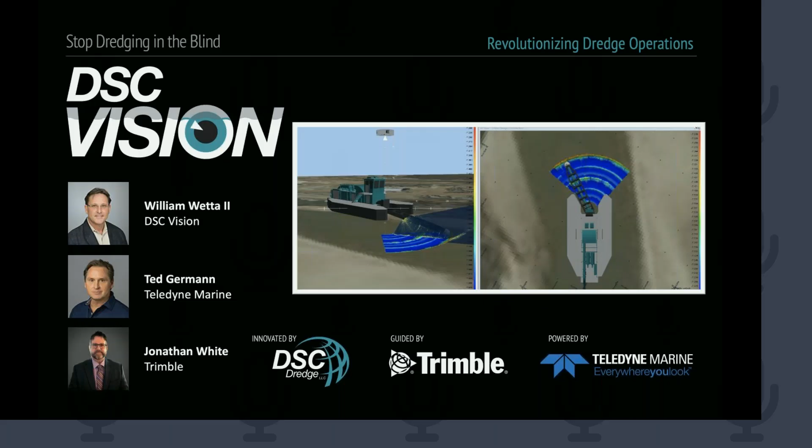Moderate today's event. Thank you for joining us for today's webinar, DSC VISION, Revolutionizing Dredge Operations. DSC VISION is an exciting new collaborative technology that we're pleased to share with you all.

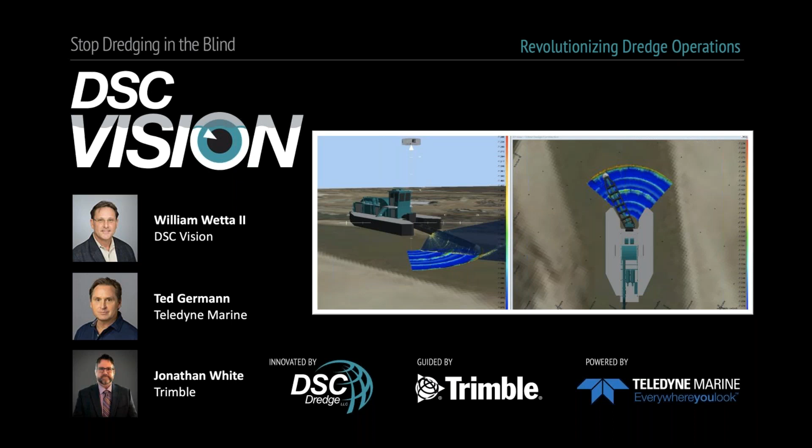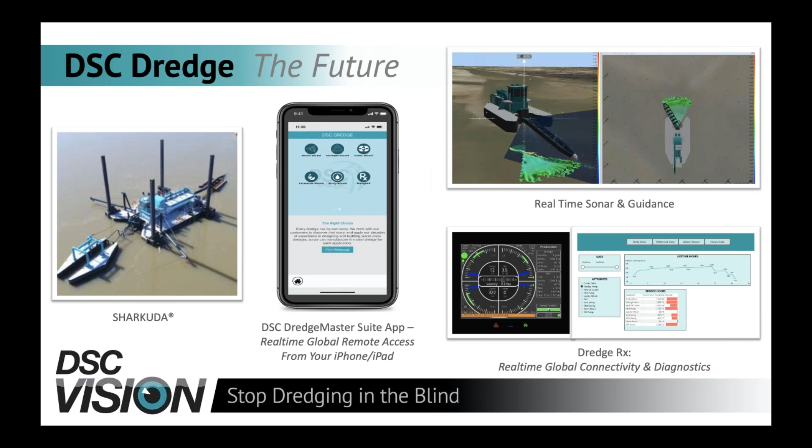Before I go on and talk about how all of this falls into the DSC Vision package, I want to let you meet some of the team that made this an affordable and available product now. So I'm going to turn this over to somebody who's become a good friend of mine in the process of doing this. This is Ted Germann. He's the Vice President of Business and New Markets with Teledyne Marine. Thank you very much, Bill. And that was an excellent introduction to your company. And I think as we move through our talk today, you'll see why all of these companies have come together.

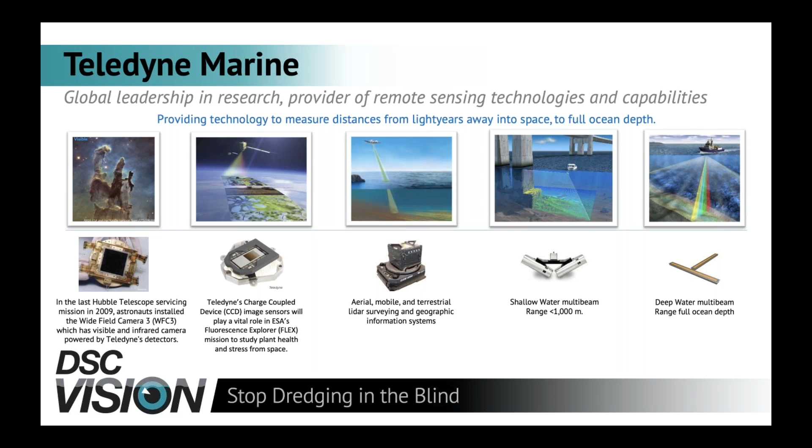It is a very long, impressive list, and it's our ability to work strategically with these agencies to solve some of the world's toughest scientific problems that led to bringing DSC Dredge, Teledyne, and Trimble together. Next slide, please.

The challenge that we had put forth to us was we'd like to take that great imagery provided in your hydrographic and survey space, generally used on a survey boat. Many of you on this call are familiar with pre- and post-construction surveys. How can we move that technology into a real-time visualization solution for the operators in heavy construction equipment, whether it be a wire crane, an excavator, or a dredge?

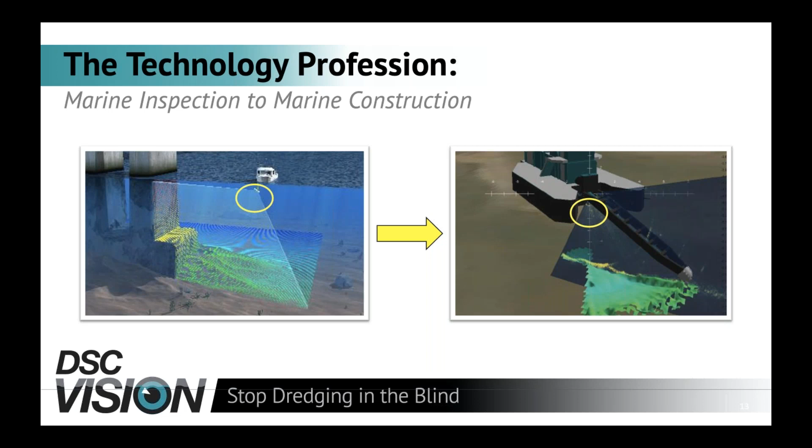And that again is where Teledyne and Trimble Technologies have come together to provide excellent guidance and GPS locations for where work is being done anywhere in the world, and it can be seen real time anywhere in the world. And with that, I turn this over now to our friends at Trimble, Mr. Jonathan White.

Thank you, Ted, and thank you, Bill, for having us here today. Again, my name is Jonathan White. I'm a product manager for Trimble's Civil Engineering and Construction division, and my focus is in the marine business area.

So next slide, please. For those of you who may not have heard of Trimble, we're a very large, publicly traded technology manufacturing company. We're similar to Teledyne in that we also have a diverse product portfolio with technology used across many industries and markets, but we pride ourselves in being a global leader in connecting the physical and digital worlds through our primary core business, which is geospatial and construction surveying, including machine control.

Trimble technology is deployed on some of the largest construction projects around the globe. And over the last 30 years, we've built partnerships with an extensive range of OEM manufacturers who offer Trimble guidance and machine control on their own machines. Today, we can add DSC Dredge to that list. Next slide, please.

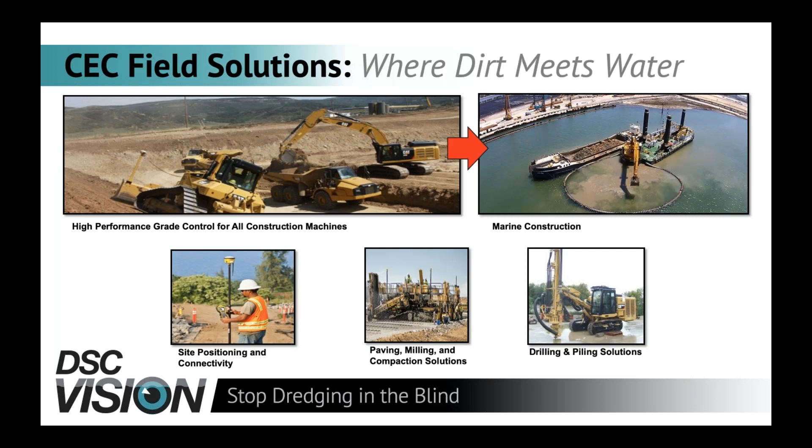So over the years, we've taken what we know about machine control and guidance in land construction and applied it to where dirt meets water for marine construction applications. Of course, that's why we're involved in this partnership you're learning about today. Other Trimble civil engineering and construction markets which may be relevant for this audience include our extensive range of site positioning and connectivity solutions, also paving, milling, and compaction, and drilling and piling solutions. Next slide.

The Trimble technology integrated into the DSC VISION system provides precise position and heading and also measures motion of the ladder and attitude of the dredge. The sensor data is communicated back to DSC VISION, so the location of the cutter tool and the sonar soundings can be accurately measured and displayed within the DSC VISION user interface. The Trimble MPS 865 GNSS receiver paired with ruggedized marine-grade antennas provide that position and heading.

By GNSS, I mean that the receiver makes use of multiple satellite constellations, not just the United States GPS satellite constellation. This means that you have more satellites in the sky, which helps to quickly and accurately triangulate your position on the ground, or in this case, on the water. Different levels of precision are available, from greater than a meter down to 1 to 2 centimeters of accuracy.

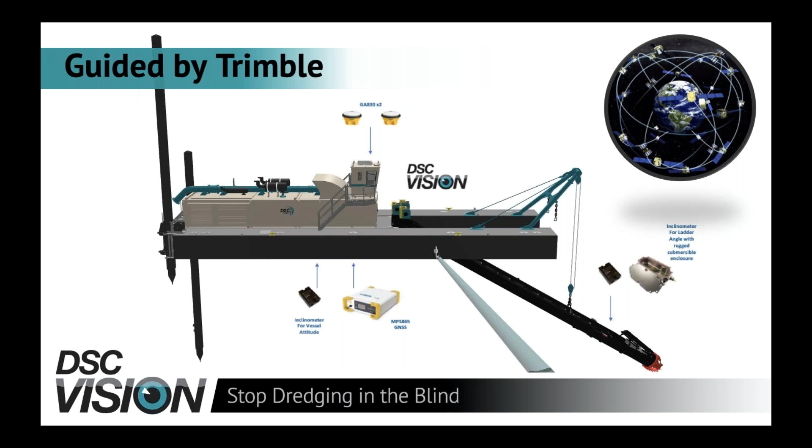The angle sensors we're using for this system come from our Loadrite group within Trimble, and they're built to work on machines in tough, harsh environments. The attitude sensor is typically installed inside the cabin along with the GNSS receiver. That attitude sensor gives us the pitch and the roll of the vessel. The ladder sensor is enclosed in a heavy-duty stainless steel submersible enclosure rated for a depth of 20 meters. Now I'll turn it back over to Ted so we can learn how all of these hardware and software components work together to form DSC VISION.

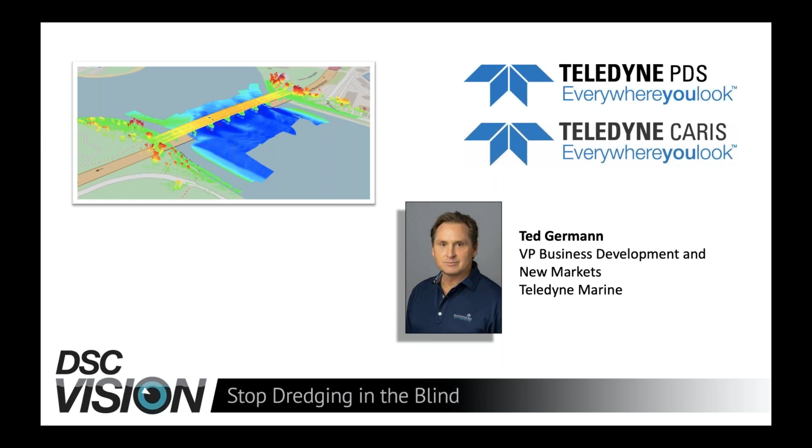Thanks. Excellent. Thank you, Jonathan. And with that, I'll conclude with my piece of this presentation. Next slide, please.

I told you that the challenge that was put forth was move vision from the surveyor to the operator so that we can work in real time. And I can't stress enough, Teledyne has all of the pieces. We share technology, and we also have multiple business units that we can work across with to solve problems. In this particular case, we used our Port Dredge Solutions group out of Rotterdam, our CARIS software group out of Canada, and of course, our phenomenal imaging group out of Denmark.

And we brought the pieces together to take our PDS software, which applies real-time data acquisition with an engine that can work across multiple marine construction applications. We paired that with CARIS to process that data in real time. No longer takes days. Anywhere in the world, you can see what's going on as they work. But we also had to keep in mind the operator is working in real time. The operator needs to see now. We needed to make the software go from multiple screens to just a few buttons for the operator to use so that they can see.

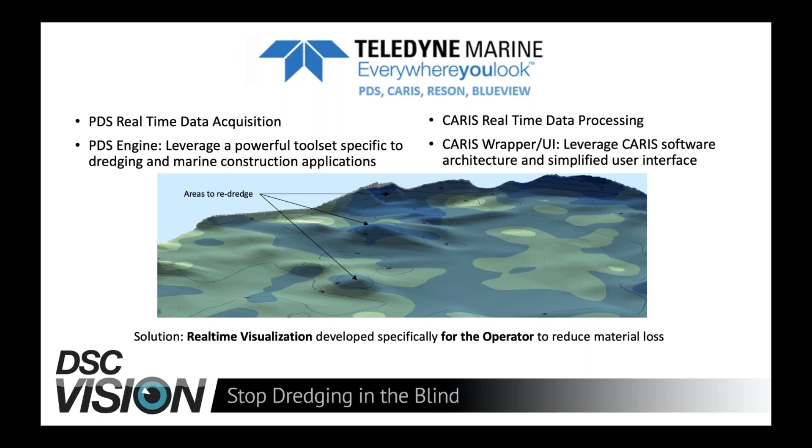And again, the challenge we had, the picture you see in the middle, is an actual aggregate mine, and where the arrows point indicates valuable material that was left behind. The objective was to provide a real-time visualization solution for the operator to reduce material loss and make the job much more efficient, easier, and safer for the person working in the cab. So with that being said, we now will get to the solution that we developed in conjunction with Trimble and DSC Dredge. Thank you.

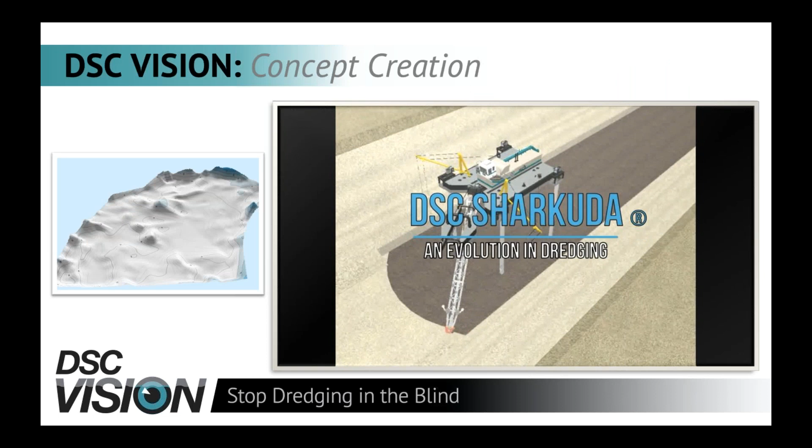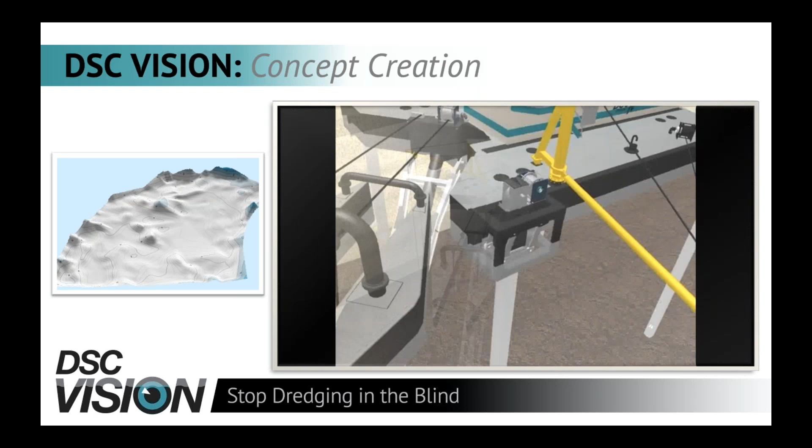Thanks, Ted. Next slide, please. When Ted mentioned that we came to them and presented Teledyne with a problem, the animation you see on the right is basically the problem that we presented them with. This is an animation of our new SHARKUDA dredge actually going through the paces and moving. And you can actually see what looks like anchor booms are really lines back to the ladder to help swing the ladder around. And as you'll see, the dredge is moving forward on 4 individual gliders or spud carriages.

So this dredge has the capability from a control standpoint to really move forward, move backward, move up, move down, move left, move right on demand. Very, very controlled. The one piece that was missing, and in this image it looks great, but what is the material doing below the surface for real behind the dredge or in front of the dredge? How do we know what's there? And as you see with the dredge, it's going to make a move forward and it's going to swing back across the cut.

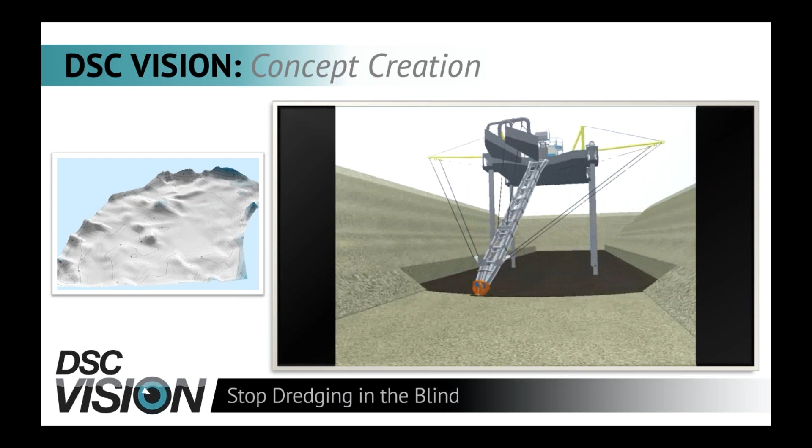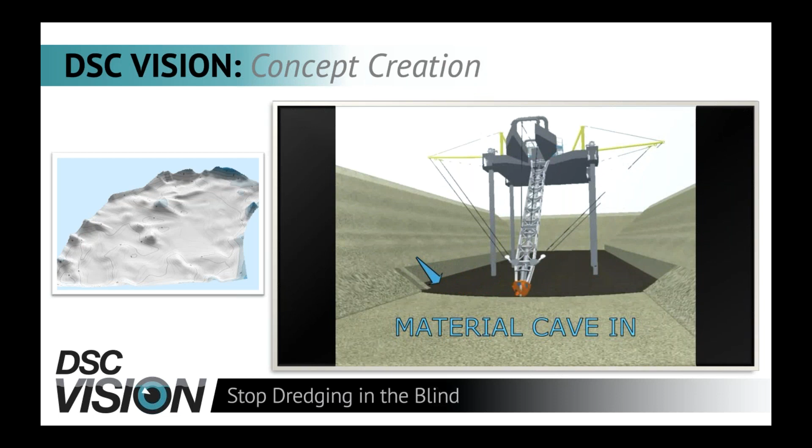What you'll see take place is very common in the dredging industry. So the dredge is moving across its cut now and moving to the starboard side. And as it moves away, you'll see that material is caving in behind the dredge. This happens on every dredge, whether it's in an aggregate market or a navigational channel or an environmental control job.

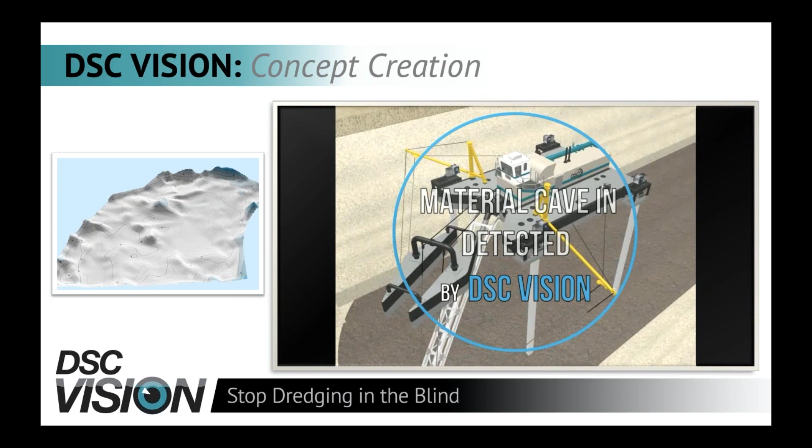What we wanted and what we tasked Trimble and Teledyne with was help us build a system where we could detect that real time and allow the operator to step back and clean that area up while the dredge was still on location. Or in an aggregate deposit, get that material before we put tailings on top of it.

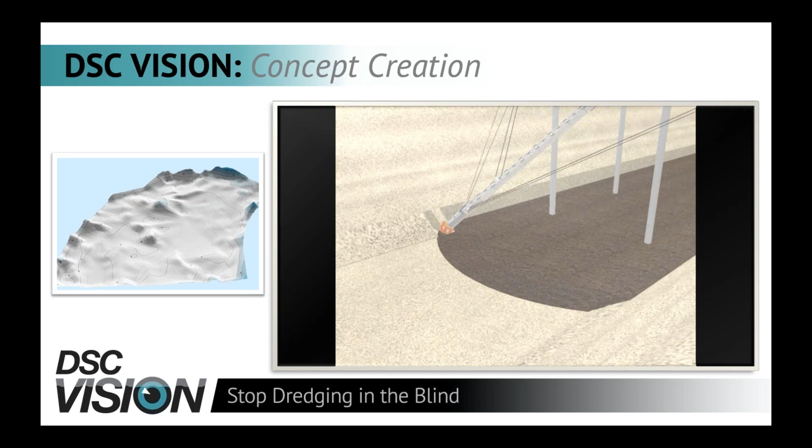The image on the left is a very similar image to the one that Ted had shown just a minute ago, and it is a post survey from a dredging site. The humps you see are material that was left behind. Some of the lower areas is material that was dug that really the aggregate producer didn't want. So that typically would have been clay material that now they had to process. The goal of this system is to get rid of these things. Next slide, please.

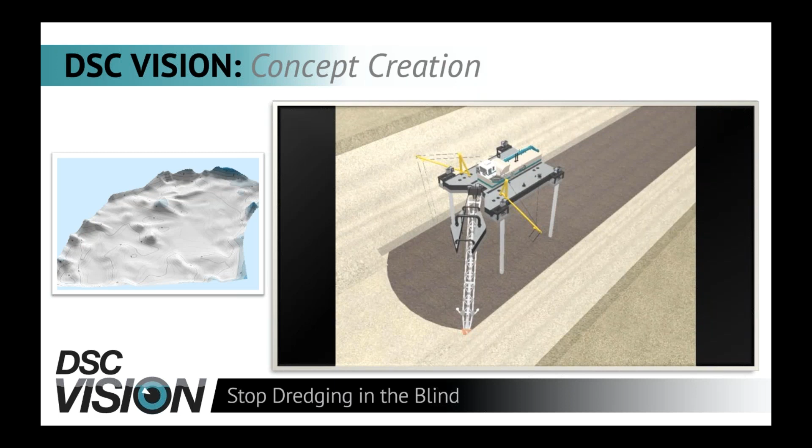So after meeting with Teledyne and Trimble, we came up with a suite of products that we wanted to try in the field to see what we could and couldn't do. The first thing we had to do was select a dredge. We had a brand new 8-inch Moray dredge, which is shown on the left. That's a very small swinging ladder dredge.

And we had to find a location. Well, it just so happens we have a wastewater pond in Louisiana by the DSC facility. Unfortunately, it's very shallow and very dirty. It's full of debris, sticks, even alligators. So I couldn't think of a worse condition to try this in.

And we outfitted this dredge with several different sonars, with an RTK Trimble system, with the DSC RX or the Dredge RX package. We put the dredge in the pond and wanted to see if we could actually see the bottom and if we could see what the dredge was doing.

The image to the right is some of the sonar returns we got back off of the imaging sonar. These images are not what we wanted as far as bathymetric to look at the bottom, but in this pitch black water, you can actually see the cutter head spinning and the ladder moving, and the ridge you see up at the top is the bank in front of the dredge. So we were able to see real time what the dredge is encountering.

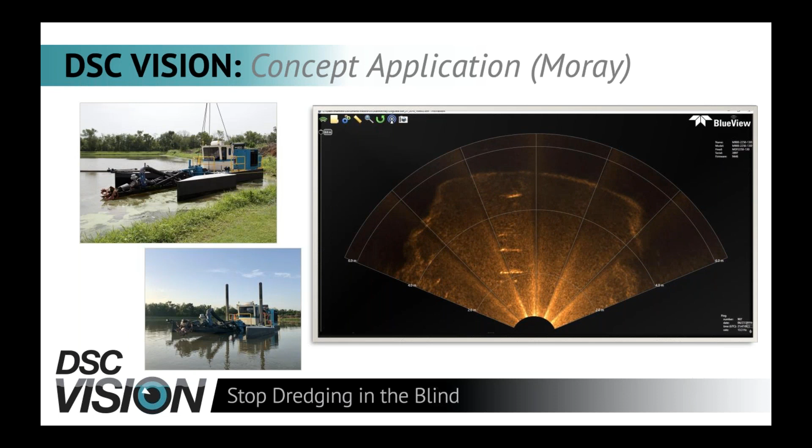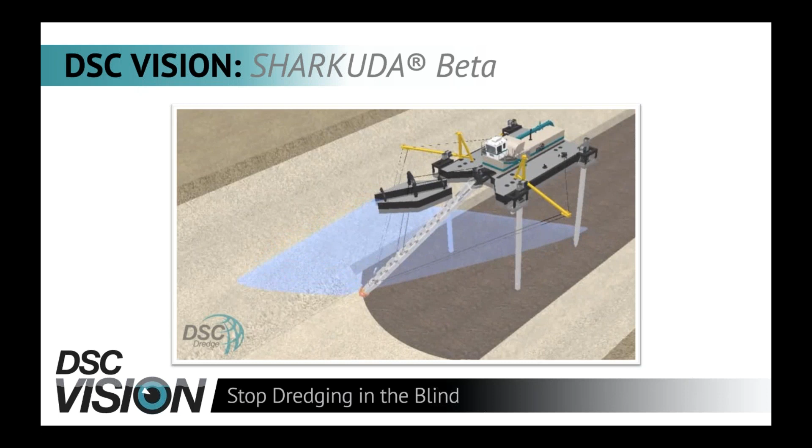The next step was to put this in place on a real dredge. And there was no better tool than the newest dredge DSC had created, our SHARKUDA. What you see now on the same animation you saw earlier, we didn't know where to place the sonar originally. You see the sonar sweep now taking place on the SHARKUDA. That's that bluish looking cone. So the dredge is not only seeing the cutter head position as it moves across, but it's seeing the area in front of the dredge and the area behind.

So we moved this dredge into the Red River. The Red River is located between Texas and Oklahoma. This was some of the DSC team that put the dredge together, and it was outfitted with an RTK Trimble system and an imaging sonar from Teledyne with the Dredge RX package and automation tied into the dredge control system.

So you're seeing the dredge actually operate now, sped up slightly in a video. The sonar is located on those forward tanks that are moving ahead of the dredge, and the sonar is sweeping from left to right.

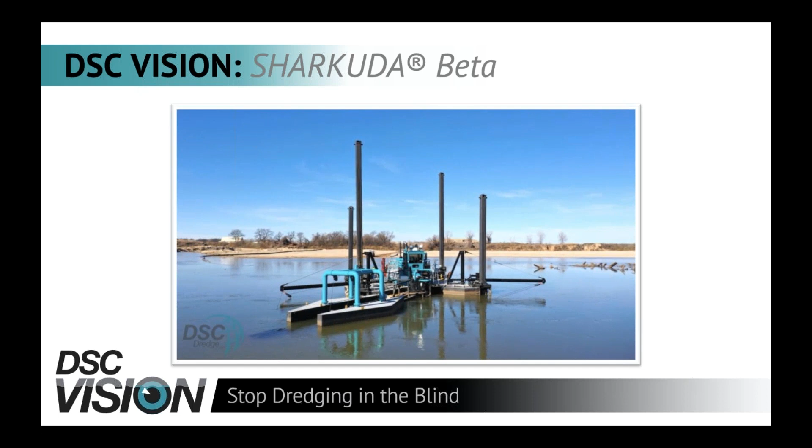We also had, once the dredge got in place, the CARIS team join us, and that was the photo there. We had the PDS team join us, and we had the Trimble team join us remote. And we spent a week tweaking sensors, aiming sonars, and collecting data as a final proof of concept, and going through all the things that we might need to change before we roll this package out. Next slide, please.

One of the things that jumped out right away on the SHARKUDA product is the equipment that we had on there was bulky, and the equipment that we had on the dredge really required somebody that knew something about surveying to use. And that wasn't the goal of DSC Vision. So CARIS was tasked with making this simple.

The image at the lower left is actually from our Moray test, and you can see how small the cab is. The dredge is very simple to operate. It operates with just a few buttons and a single touch screen. The software, on the other hand, was very, very complicated. Just to set up sensors on the ladder would take hours. The end result, after we worked with CARIS, was a package that pretty much was a button click type software.

So what you see now on the right is what the software looks like when the operator first turns the dredge on. And depending on what dredge and what fleet of dredges they have, the operator can select which dredge he has. And in some cases, we have dredges that have different attachments. So long ladders, short ladders, tilting ladders.

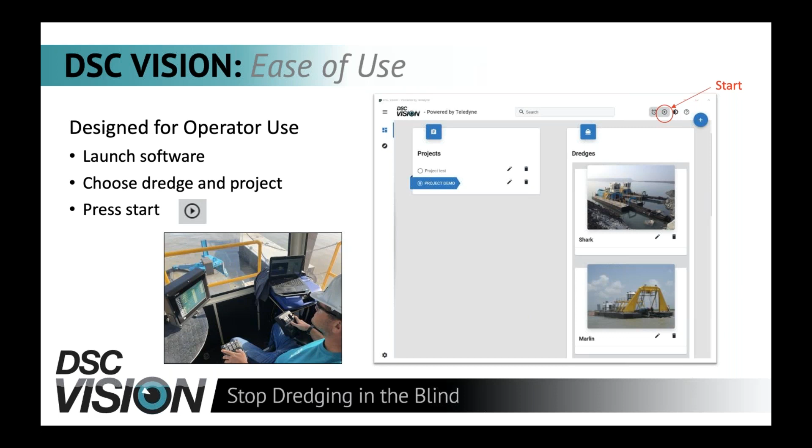So now we're ready to roll out DSC Vision. And DSC Vision has to encapsulate a lot of different industries and dredge types. So this graphic was really designed to illustrate that. If we start in the upper left-hand column, right below the factory, we have a DSC Barracuda dredge, which is a swinging ladder dredge in a lake management job. And you can see the sonar cone in the bottom being positioned underneath that.

Typically, the lake management jobs are shallow. Depending on whether it's a governmental agency or not, it may require very, very high levels of precision and high levels of bathymetry. Or if it's privately held, they just want it cleaned up. So it really varies. And usually, those applications are not very rugged. They don't require very robust equipment.

The next image to the right is our Moray dredge in an environmental cleanup operation. That dredge is actually pumping into a set of geobags. The level of precision on environmental jobs and the level of reporting is the highest out of anything that we deal with. It's very expensive to process contaminated material, so it's very important that the dredge gets it all the first time and doesn't get anything that's not contaminated. So it has the highest sonar requirements, the highest GPS or GNSS requirements, and the highest dredge control and reporting facilities.

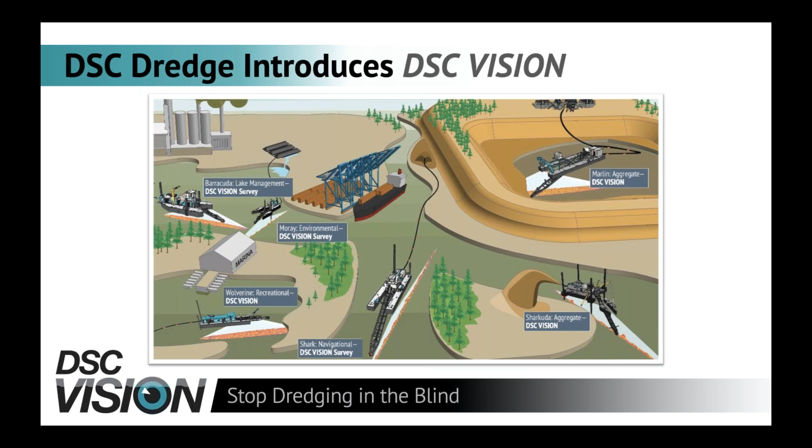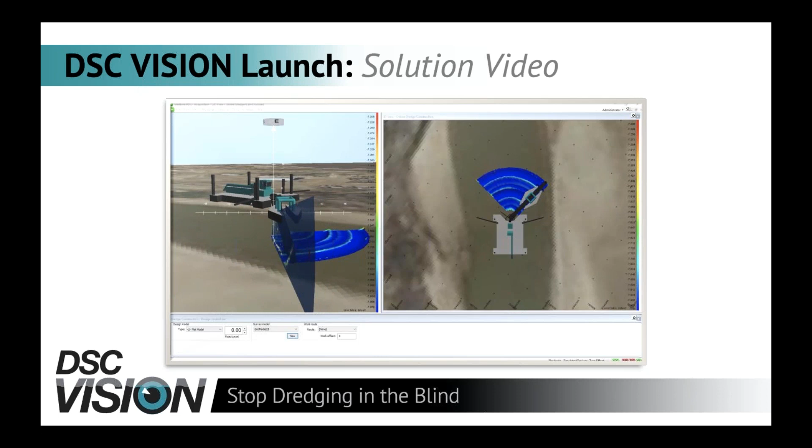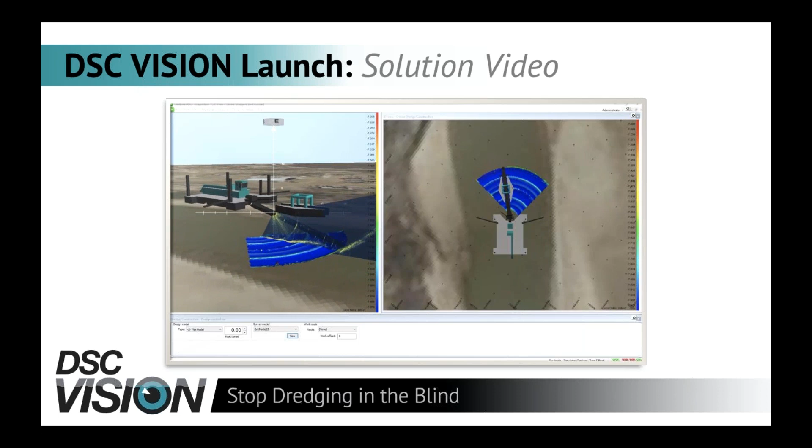The image right now on the left is the sonar return, the leftmost portion, and that's that green orangish looking line. And that's where the Teledyne software basically detects what the bottom is. But what's important about that image is you can also determine to some extent what the material is that's currently being encountered. On the Oklahoma dredge, we were able to tell the difference between sand, shell, gravel, and debris. So as this package unfolds, a permanent map is created as to what the dredge has done. And even if there was no survey before, the dredge is creating a real-time survey as it digs.